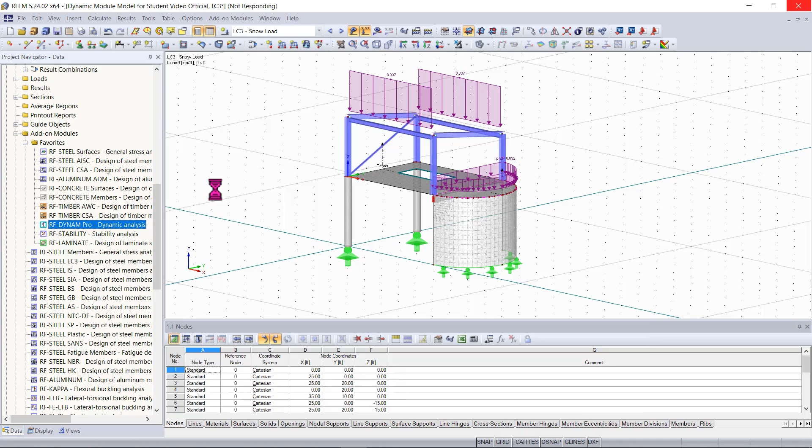And now you'll see that this simple dialog box will come up, and you will see that all of the other individual add-on modules are here. You can also see that natural vibrations is automatically checked, and this is because, as I said, it is a prerequisite. So we can first activate our mass combinations, which is needed, and then you'll see that the mass cases and combinations tab will pop up here.

Now all we really need to do is just work from left to right through these tabs. So the first tab we want to go through is the mass cases tab. And the first mass case we want to import is the dead load from RFEM. So now that we have our first mass case created, we can type in 'dead' for this mass case.

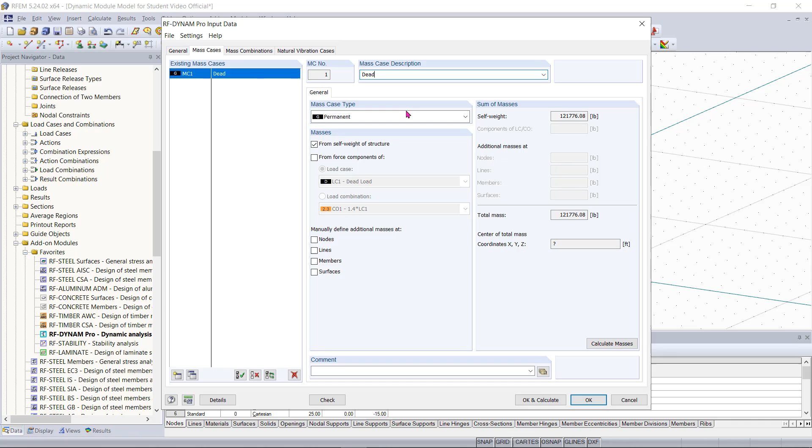Then once we go down here and check off 'from force components', I can select my dead load, and this will automatically be imported in from RFEM into the module. We also want to make sure to uncheck the option for self-weight of structure. The reason for this is because the self-weight of the structure is already being taken into account back in RFEM, and if we check this option, then the self-weight will be taken into consideration twice.

Now there's an option down here to manually define additional masses, but for now I'm going to leave these empty. Now we can take this mass case and make a copy of it, and then we can name it 'live', and import our live load from RFEM into the module. Then all we need to do is make a third copy and call this one 'snow'. This will be our snow mass case.

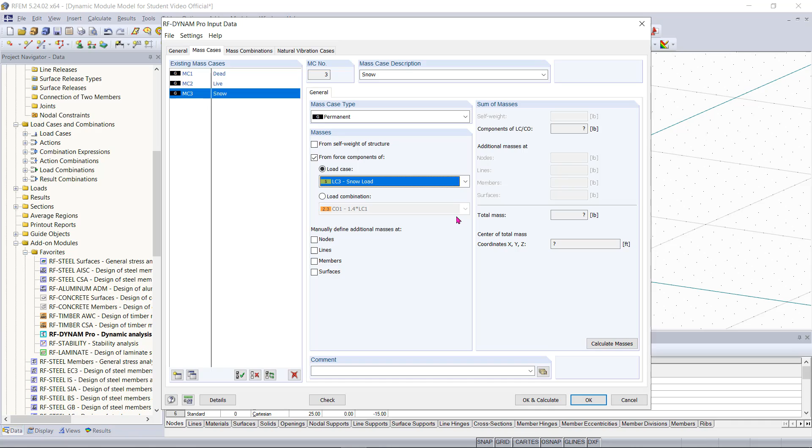And then we can go down here and make sure the snow load is being imported in from RFEM for this mass case. So now that we have these mass cases imported, we can proceed by combining these cases into mass combinations in the mass combinations tab.

So now referring to ASCE 7-16, more specifically section 12.7.2, the standard tells us that we need to include 100% of our dead load. And if I go to the code, you can see that right here. It also states that when it comes to the live load of a structure, if it's used for storage, then we need to include 25% of the live load. For this particular example, I will assume the structure is used for storage, so I will use 25% of the live load.

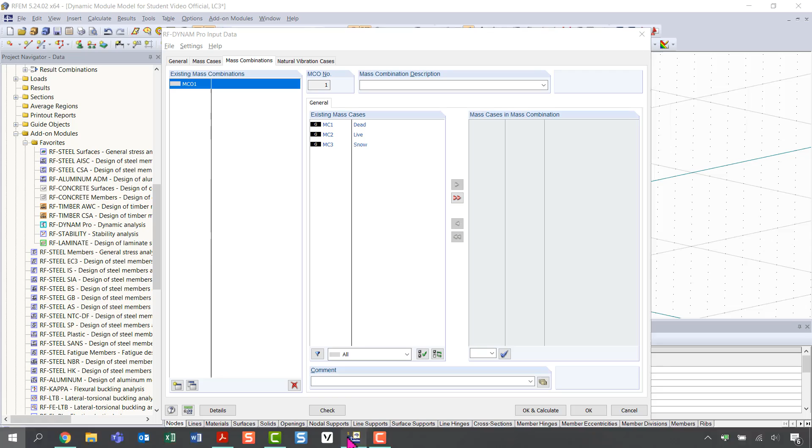So if I hop back to RFEM, I will move the dead load over and include 100% of the dead load by keeping this factor at 1.0. Then I can move my live load over, and all I need to do is double-click on this factor and change it to 0.25 and hit enter. Now we have a factor of 0.25, so we're only including 25% of our live load.

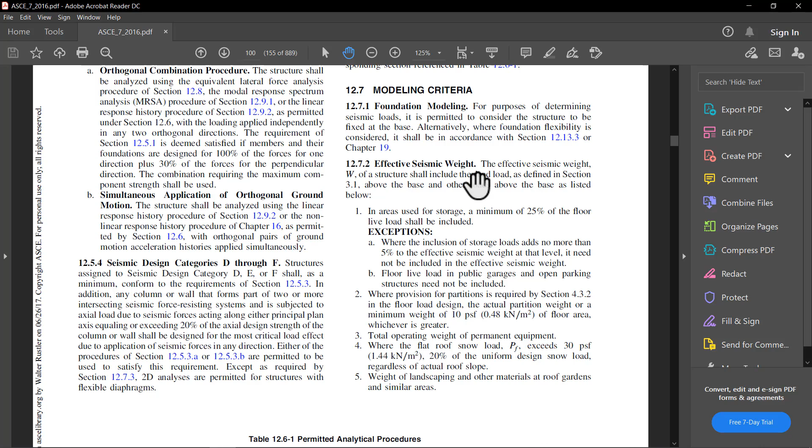Now the code also mentions that for our snow load, if it has a magnitude of over 30 psf, then we need to include at least 20% of our snow load. In this example, if I go back to RFEM and hit OK and go to my snow load, you can see that I have 32 psf applied to the structure, so now we can move our snow load over and apply a factor of 0.2 to the snow load.

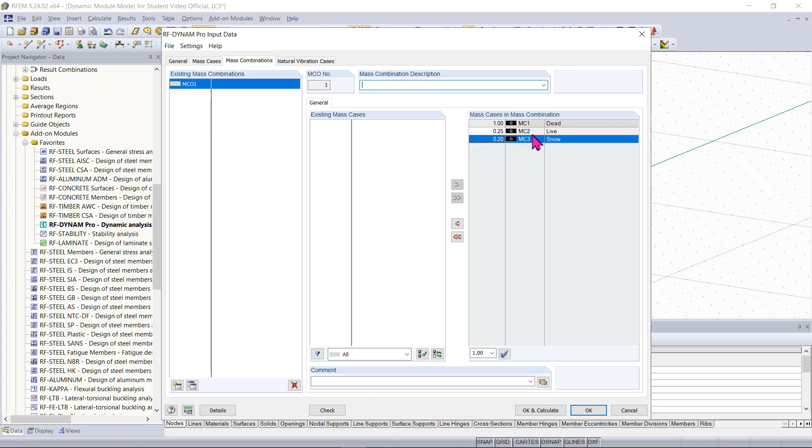So now we can give this mass combination a name, and we can call it dead plus 0.25 live plus 0.2 snow.

And now finally we can take a look at our natural vibrations case tab. So the first parameter we should take a look at is the number of lowest eigenvalues to calculate. Right now this parameter by default is set to 4, but for today this is fine. We're just going to leave this as default for this example.

And then the scaling of mode shapes is the next parameter we want to take a look at, and you can see there's a couple of options here. Right now, the default is to just take the square root sum of the squares.

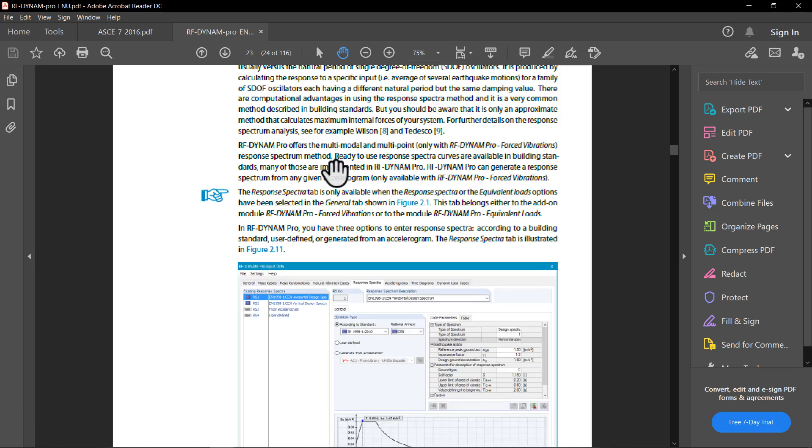With these couple of options, I encourage you to take a look at our help manual for the dynamic module, where you can see a little bit more theory on how the calculation is done for the scaling of the mode shapes. You can take a look at this manual by going down here and clicking on the help button. Within this manual, we can scroll up to page 19, and here's where you'll find more information on the other options for the scaling of the mode shapes. This will help determine if the other options are better suited for your design project.

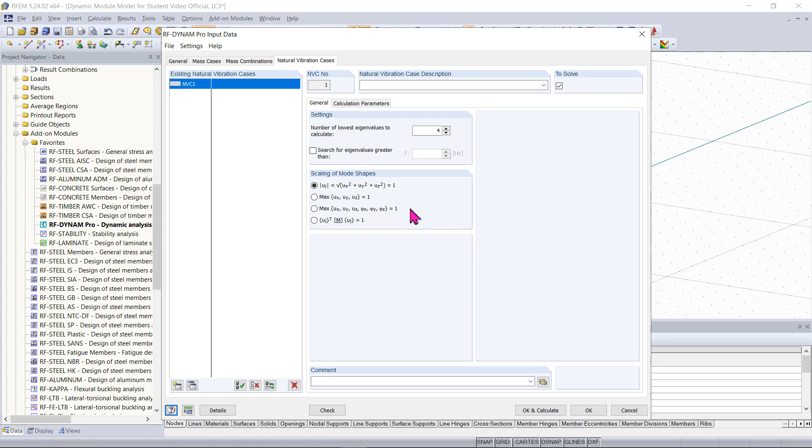So back to RFEM, the next section of data to focus on is the calculation parameters. Here we want to choose the mass combination that we just created. When it comes to the acting masses, these are controlled by the acting mass matrix as well. You should be able to see here by default the diagonal matrix with only the translational degrees of freedom is set, so our masses are only going to act in the global x, y, and z coordinates, which you can see back here in RFEM.

And you can see there's other options to include both translational and rotational or torsional degrees of freedom. So with these options, you'd be including masses about those axes. There really are a couple of different options you can choose from here, and for now we will just go with the first default option.

There are also multiple options for choosing the method for how the eigenvalues will be solved. We have different calculation types you can see here, and for this example video we will be utilizing the Lanczos solver, which is an iterative method used to determine the lowest eigenvalue and corresponding mode shape of larger models. Basically this solver allows the user to determine a quick convergence, and in contrast the root of the characteristic polynomial method will calculate all of the eigenvalues and corresponding mode shapes, so this method will take a lot longer.

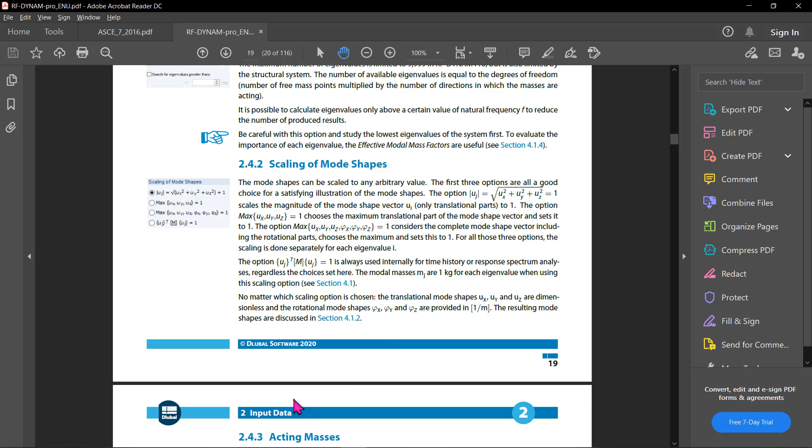When it comes to deciding which set of mode shapes and solver to use, we can again take a look at the help manual for a better understanding of the theory behind these options, and this will help you decide which options are best suited for your project. We can take a quick look at these on page 21, and I can zoom in and we can see the different types of eigenvalue solvers here and the theory behind each one.

So back to RFEM, with regards to the stiffness modifications, we're going to leave this as no stiffness modification for now, but keep this in mind as I'm going to discuss this in more detail later on in the video series. And so now we are done basically with entering all of our necessary input data needed to run a calculation for our natural vibrations case.

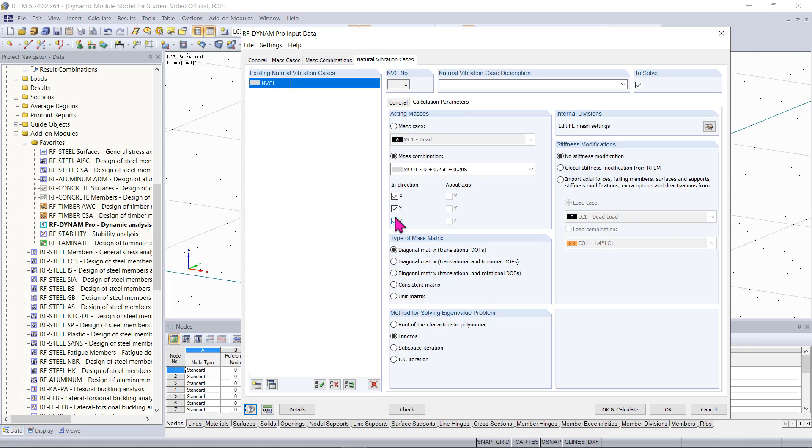In the next video, I will be running the calculation and explain how to interpret the results. So look out for that video, which will be Dynamics Part 2, Natural Vibrations Results, and I thank you for watching.